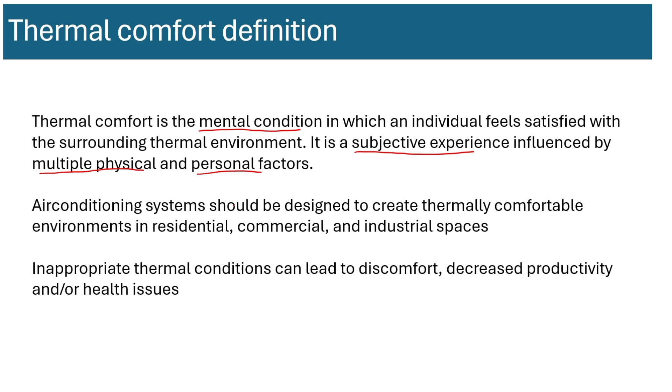For example, if you consider the environment to be a lab or a factory where it is essential to wear proper safety equipment, PPEs like a lab coat, a fire retardant coat, thick gloves, helmets, glass goggles, face masks, things like that - if those are needed for proper functioning in that lab, factory, or workspace, inadequate thermal conditions might lead to workers not using that safety equipment, which will create a safety issue.

So thermal comfort is one of the important considerations when we are designing an air conditioning system.

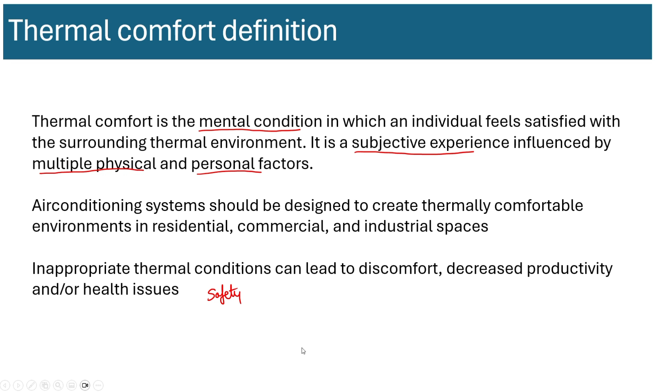Now let's look into the thermal experience of a human being. We all know that human beings maintain a core body temperature close to 37 degrees C. That's true under most cases for most people, somewhere around this.

We are always losing heat or gaining heat from the surroundings. We're always doing some work and losing heat that way. So how is our body generating the heat that lets us do all this? There is a metabolic reaction happening within our body, mostly within our digestive system, but also a lot of energy is released in your muscles and other organs. Overall, you could say there is a metabolic rate at which heat is being produced by the body - this is the generation term.

When you walk, move objects, climb, push things, or exercise, you're doing a lot of work, exchanging heat with your environment. You could be standing in the wind under a fan or a draft, so you're losing or gaining heat through convective means. If you walk under the sun or stand next to a fire, you might be gaining heat through radiative means. The same way you can lose heat through radiative means when you stand next to something that's really cold.

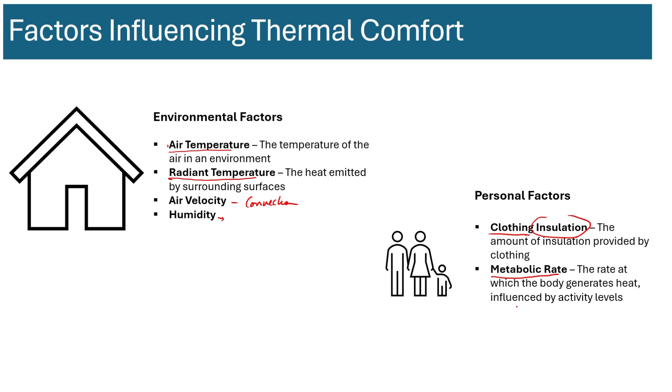In addition to that, the metabolic rate that we just discussed, the rate at which the body generates heat, is primarily influenced by the activity level.

There are several standards that provide guidelines on thermal comfort of a room or air-conditioned space. The most important one, or most commonly referenced one, is ASHRAE 55. That is primarily a North American or American standard, but it's referenced worldwide. Then there's the European standard on energy performance of buildings and ventilation for buildings, which closely correlates with ASHRAE 55 in methodology. The standards themselves may vary slightly.

There's also the ergonomics of the thermal environment ISO standard, energy performance of buildings indoor environment, and another European standard on energy performance of buildings addressing indoor air quality, thermal environment, lighting, and acoustics. Then there are two regional or national standards, one for India and one for China. In this lecture, we are primarily focusing on the methodology by ASHRAE and the European standard.

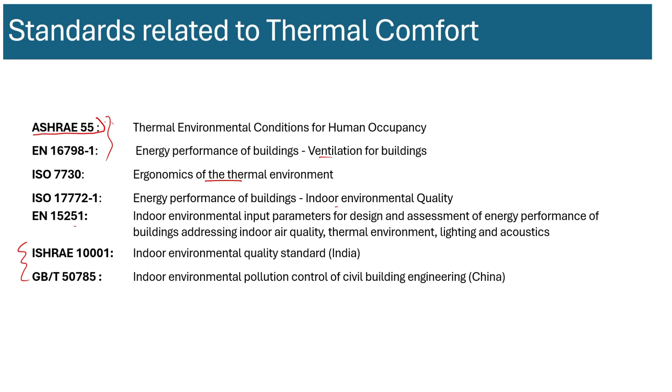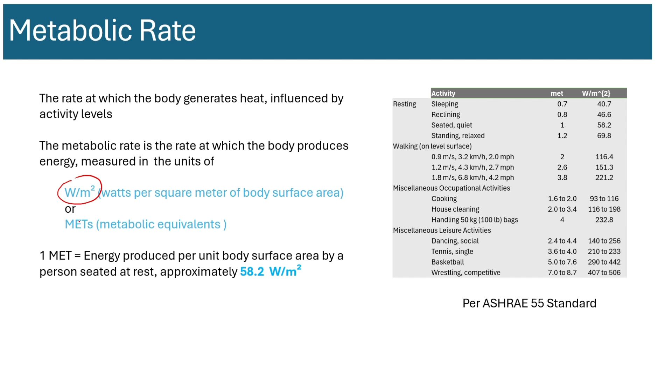Now let's look at metabolic rate. Let's figure out some ranges in which energy is released in our body. Typically there's a specific unit for metabolic rate.

The actual unit is watts per meter square, but we also write it in equivalence of METs, metabolic equivalence. 1 MET is equal to 58.2 watts per meter square. So it's basically power divided by area, or energy released or generated per second per area. That's what the unit is, and 1 MET is 58.2.

Where does this 58.2 come from? Apparently, this is the energy we generate when we are resting, when we are not doing much work, just sitting on a chair. This is the average energy that most people generate.

You can see some empirical results here. Seated quiet is 58.2, or 1 MET. If you're sleeping, it's lower than how much you would spend when sitting. You would have noticed that your sitting heart rate versus your sleeping heart rate is much different. So when you're walking, you can almost double the amount of energy generated by your body.

And when you're really doing strenuous exercise, for example competitive wrestling, you can be expending almost 8 times the energy that you would spend when you're sitting.

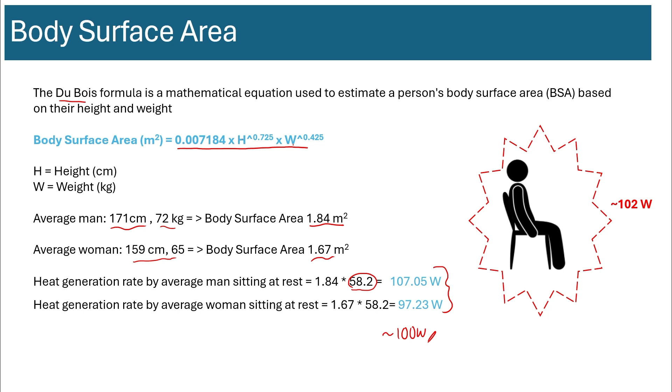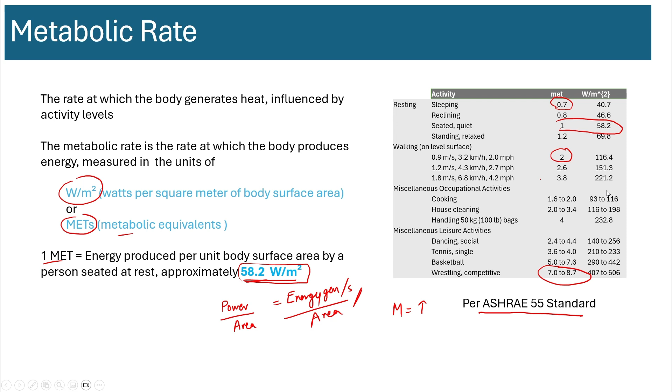All right, so the next factor is clothing insulation. How do the standards account for this? For metabolic rate, we could use some basic standards depending on the type of activity in that room - some of the ASHRAE standards estimate the amount of heat generated by the activity. The next question is what type of clothing the occupants would be wearing in that environment, because that has a substantial impact on thermal comfort.

So here also there is a specific unit called CLO units, used to represent the thermal resistance per unit area. Thermal resistance per unit area is, let's say you have a temperature difference T1 and T2, with a thermal resistance in between that has a thickness T and thermal conductivity K. The thermal resistance due to conduction is primarily defined as T over K, where K is the thermal conductivity, as the thermal resistance per unit area.

Now, CLO is defined in CLO units, but in SI units, the units would basically be the units of this item here. Thickness has units of meters, and the units of thermal conductivity K is watts per meter Kelvin. So overall it comes out to meter square Kelvin per watt.

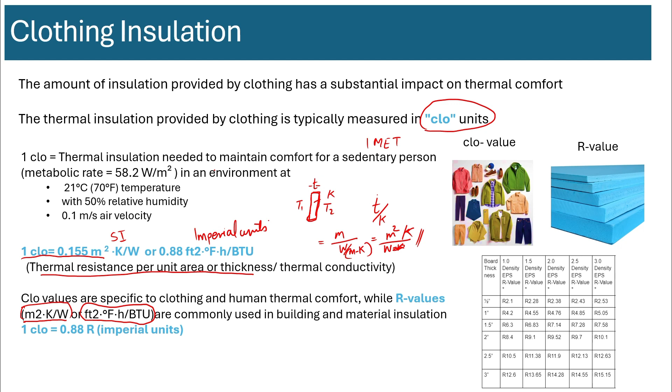Now what does 1 CLO represent? It is the thermal insulation needed to maintain comfort for a sedentary person, that is a person sitting quiet with 1 met, which is 58.2, in a particular environment: 21 degrees C, 70 degrees Fahrenheit, 50% relative humidity, and an air velocity of 0.1 meter per second, which is very low.

So in this condition, the clothing that is needed to keep that person neutral or feeling satisfied is defined as 1 CLO, and it's been empirically determined to have an insulation or thermal resistance value of 0.155 or 0.88 depending on the type of units you're using.

Now, how does this CLO compare to some of the resistances that you're normally used to? For example, if you have any experience with insulating your house or an equipment in your house, you would have noticed this construction material, which is basically EPS or XPS, extruded polystyrene.

That is typically represented by an R value for its resistance. The smaller the thickness, the smaller the R value, and R value is basically the same as thickness divided by thermal conductivity. So the thinner the material, the smaller the R value, right? So it's the same.

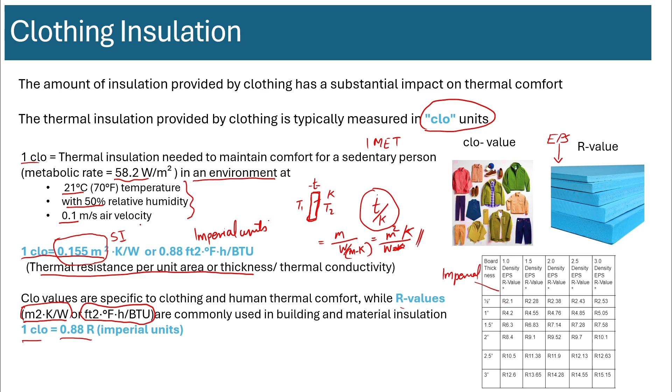How are the clothing insulations measured to figure out whether the person is thermally comfortable in a particular environment? The way they do that is using two thermal conductivity tests. One is thermal manikin testing—you create a thermal mannequin which is life-sized, and you have heaters inside the mannequin, and you also use heat flow sensors.

The mannequin is typically heated somewhere between 35 to 37 degrees C, which is close to the core temperature, and it has a control system that tries to control the temperature to this range. Now you change the ambient conditions to make sure the mannequin cools down below this, and then you'll have to adjust the amount of heating needed to match the new temperature.

So the difference in the amount of heat that is needed with and without clothing material under a particular environmental condition is used to determine the CLO value of that particular cloth.

You could also do this without the mannequin, with just a flat heated plate covered by the fabric, but that doesn't fully account for the total surface area of the person. Both these methods are used, and this is how empirically the CLO values for each type of clothing are found out—this is sort of a heat transfer test aimed at making sure the core temperature is maintained.

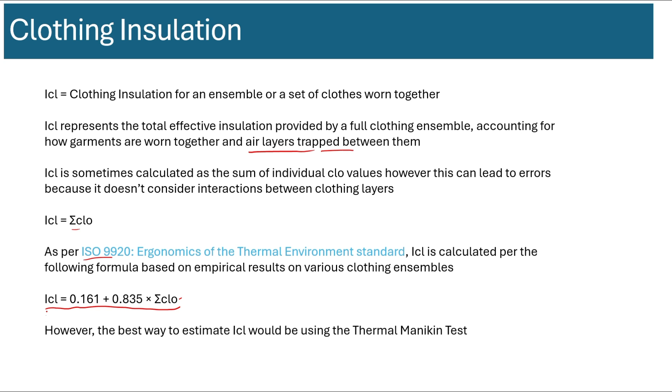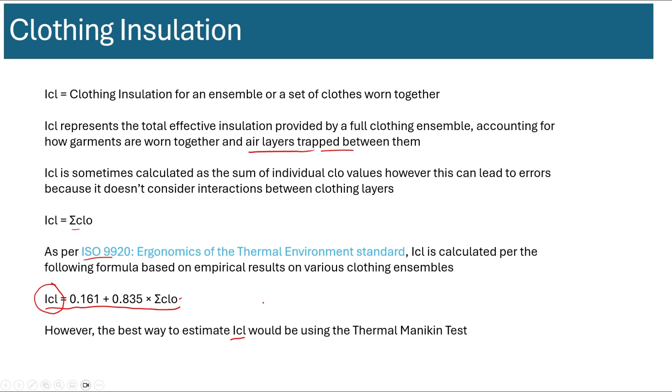So sometimes approximate formulas are used. ISO 9920 proposes a particular formula: if you have different clothes with different CLO values, instead of summing them together, you use this formula to estimate an average ensemble insulation of the whole set of clothes you're wearing. Typically this is the value we need overall to understand the thermal comfort within a room.

So we looked at the two personal factors that affect thermal comfort: the metabolic rate of the occupant and the clothing of the occupant. Now we look at the environmental factors, and the first one is air temperature.

What do you mean by air temperature in this sense? Let's consider the weather forecast. I don't know whether you've ever tuned into weather channels, especially in the US. There are several weather channels, local and national level, and they always report the daily average temperature, the max, min, all those temperatures every day. Sometimes they predict for weeks and months ahead. So what temperature are they talking about?

When you talk about weather temperature, they're talking about the temperature outside your house. But when you walk outside, the temperature is not the same if you're under a tree in the shade, or if you're exposed to sunlight, or if there is rain. The feeling of temperature is different. So what temperature are they measuring and how are they measuring it?

What they're measuring is basically dry bulb temperature. This will be clear when we talk more about dry bulb and wet bulb in the psychrometrics part of this course. This is the temperature of the air in the environment. When you're measuring the temperature of air, especially outside - in our context we are talking about temperature inside a room - but let's just stay focused on measuring the outside temperature.

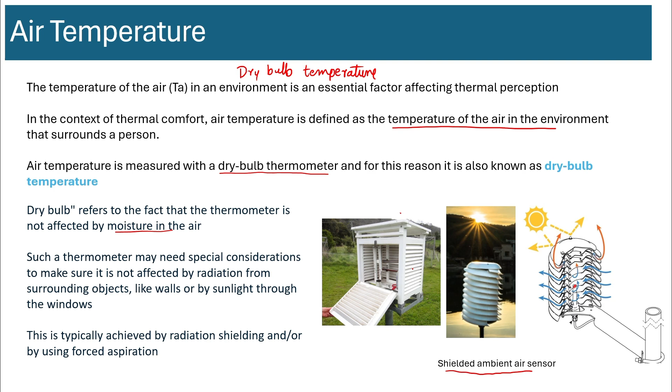Now let's look at radiant temperature. It's usually referred to as mean radiant temperature, and it's a critical parameter in estimating thermal comfort of rooms. The definition is it represents a uniform temperature of an imaginary environment where the radiant heat exchange between an occupant and the surroundings is the same as in the actual environment in which he or she is present. In other words, it's accounting for all the radiation sources or sinks in that room. So how do you measure it?

In this case, you don't want the radiation to reflect, you want the radiation to be absorbed. So you have a black body, a globe almost, that picks up radiation from all angles, and the temperature sensor is at the very center. Typically the diameter of this globe is 15 centimeters, and they're usually called globe thermometers. They're very commonly used in outside conditions, primarily for measuring the external radiant temperatures.

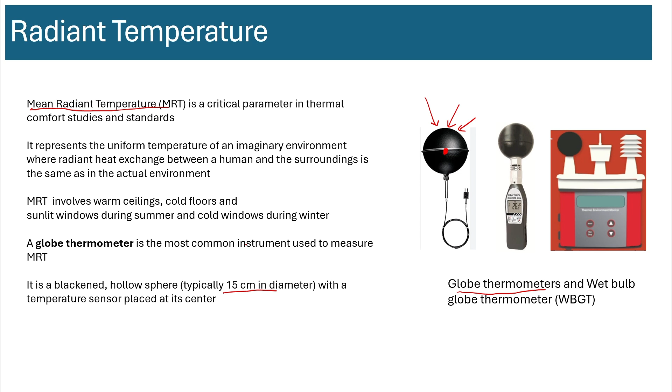Now the third parameter, or external environment factor that determines thermal comfort, is air velocity. It's a critical factor that helps regulate the body temperature both by directly cooling the surface of the body through convection and also through evaporative cooling when your sweat evaporates. So it's important in these two conditions. In a warm environment, when you feel warm, if you turn on a fan, even though the temperature of the air is not affected much, you feel a little bit colder because of extra heat transfer through both convection and evaporation.

If it is between minus 0.5 and plus 0.5, that means it is satisfactory for almost 90% of the people. So what you need to take away is that the lower limit for absolute low air velocity is 0.1 meter per second for human comfort. You want some airflow in the room, and the minimum recommended is 0.1 meter per second.

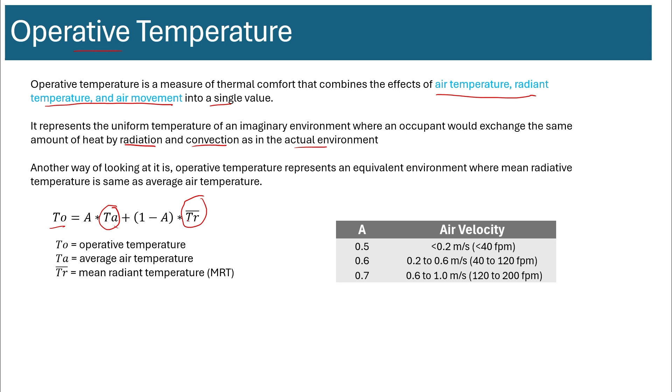When these two are the same, this value is also the same: if TA is the same as TR, then TO is the same as TA. So operative temperature represents an equivalent environment where mean radiative temperature is the same as the average air temperature. The constant value A here is dependent on the air velocity, and these are the recommended ranges.

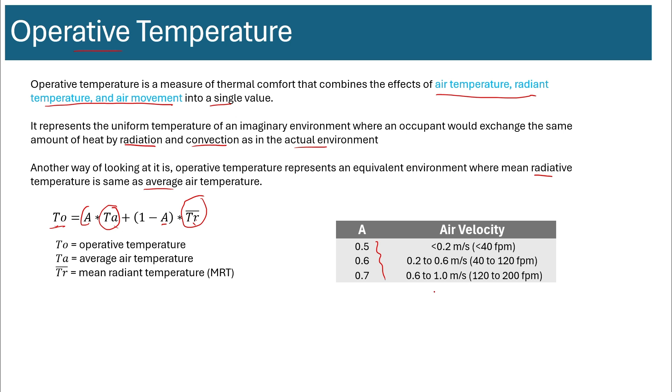Before we go into how to read operative temperature versus different values in ASHRAE 55 and figure out the recommended thermal comfort region within a room, we have to figure out how the ASHRAE 55 standard was developed.

It was an empirically developed standard, meaning it was done based on a lot of experiments. The experimental values were obtained by getting votes from test subjects - actual people placed in carefully controlled climatic chambers where variables like air temperature, radiant temperature, humidity, and air velocity are precisely controlled.

The test subjects were asked to report the type of clothing they are wearing, and they are typically asked to sit on a chair so that their metabolic rate is close to 1. But sometimes they are also asked to vary their activity level, a little bit of light walking within the room.

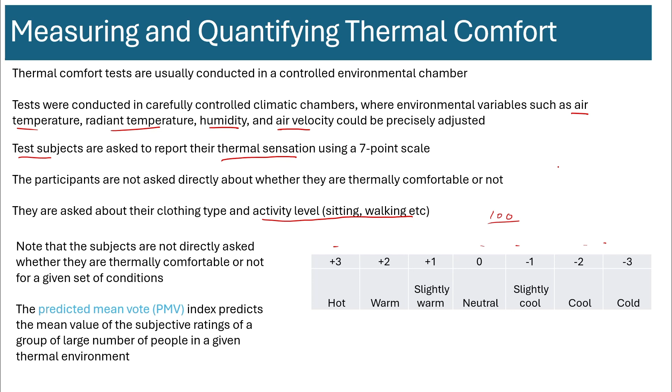They were never asked, are you comfortable or not? The way they figured out whether most people find that room comfortable was by using an indirect method. Let's say they asked 100 people for the sake of argument. If all 100 people provided a score for a test condition that was extremely cold, and all of them put -3, then the predicted mean vote for that will be -3.

If everybody found it to be neutral, then the average will be 0. And if everybody found it to be hot, the average will be 3. So the predicted mean value is going to take a value between -3 and 3. And if it's 0, that means it's perfect - everybody finds it acceptable, almost neutral. But you can see sometimes the plus and minus ones could also cancel out.

However, this is not directly used. This is further refined by using another variable called the predicted percentage dissatisfied. So if you get an average value of PMV, predicted mean vote, the predicted percentage dissatisfied represents how many percentage of people will find that room not satisfactory. Lower the number of people that finds it dissatisfactory, the better the room condition.

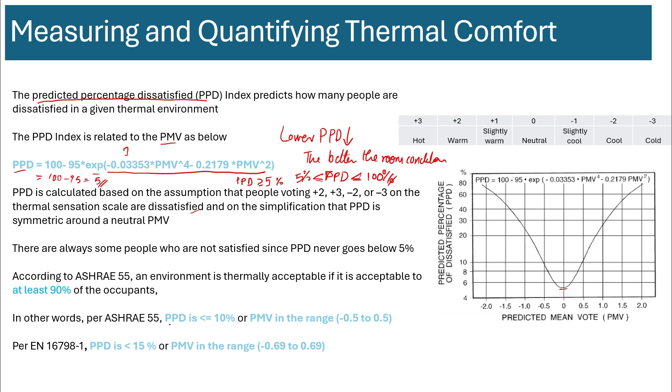So it can take any value from 5% to 100%. Now, what does ASHRAE recommend? ASHRAE recommends that PPD should be less than 10%, meaning less than 10% of the people should find it not satisfactory. If more people find it not satisfactory, then it's a problem.

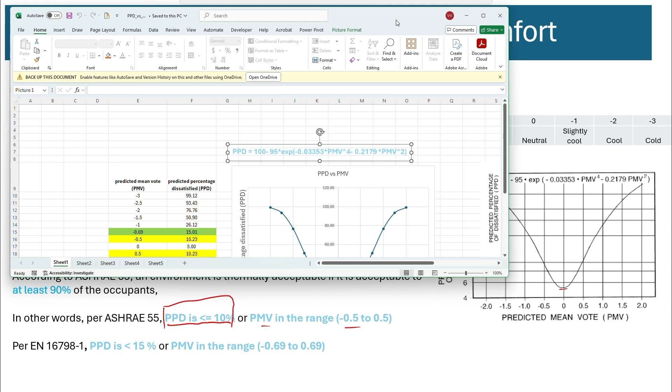Now, what is the PMV range for which that will happen? You can easily do that calculation using this formula in Excel. Let me try to get the Excel file. So I've put in the formula here - so from minus 3 to 3 PMV, you can see that it almost goes from 100% to a minimum of 5%.

And if it is minus 0.5 to 0.5, then you're close to 10%. So this is the range in which ASHRAE says a condition is comfortable for people.

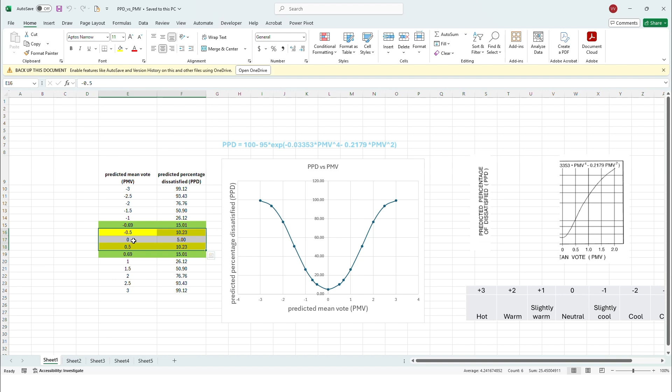The other standard, the European standard, is a little bit more lenient. They say if less than 15% of people are dissatisfied, then the room is thermally comfortable. So that means you get a little bit wider range of the predicted mean value - more people can find it a little bit more cold or a little bit more warm.

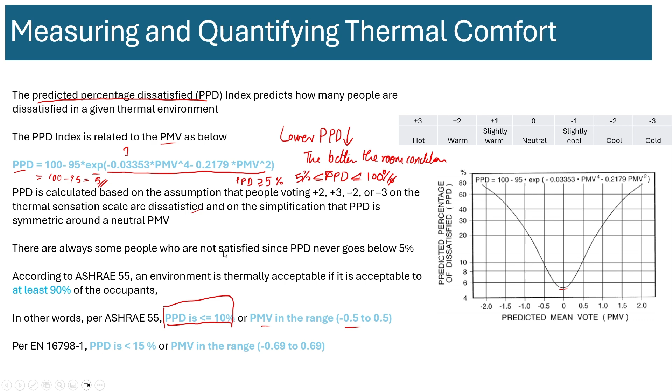So this is how the predicted mean value is calculated. And for a given operative temperature versus another variable, the predicted mean value ranges are plotted and figured out for estimating the best operating conditions for that room.

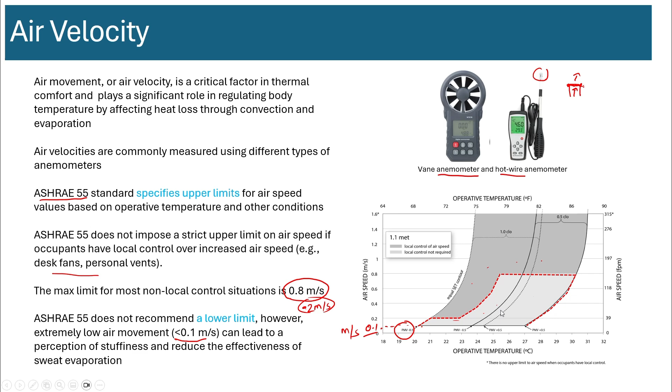The comfort zone defined by ASHRAE 55 is a chart that looks somewhat like this. This is basically a region in which a person would feel comfortable, within a range of operating conditions. It's primarily defined by the operative temperature, which includes both the dry bulb and the radiant temperature for still air, and the other parameter, the airflow speed.

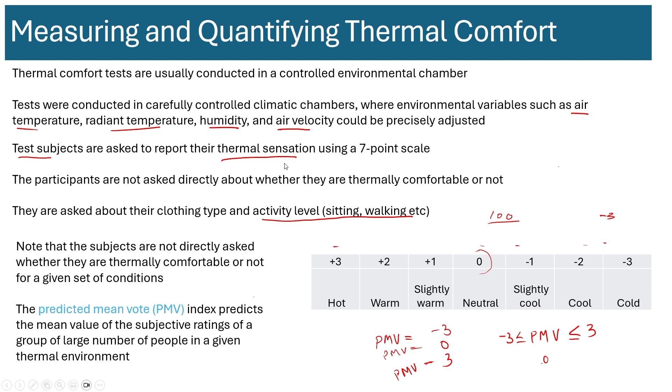According to ASHRAE's methodology, where they asked people whether the room is hot, cold, or neutral—basically a sensation of the thermal aspect—there was no limit that could be obtained for humidity. The reason, in my opinion, is they didn't ask whether the room was comfortable. I know for a fact that if the room is 100% humid, regardless of the airflow, at most temperatures it would feel really uncomfortable. And if the room is really low in humidity, close to 0%, even then it would be really uncomfortable.

To understand this further, let's look at an online thermal comfort tool provided by the University of Berkeley in California. If you use this link, you can go into this website where you can create those ASHRAE thermal comfort zones by changing any of the parameters: the operative temperature, airspeed, humidity, metabolic rate, clothing level, etc.

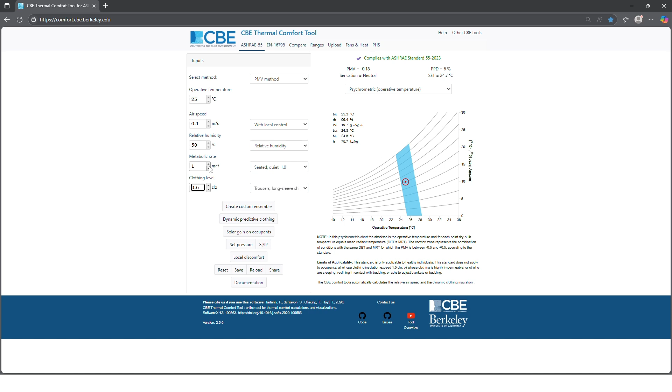You can keep changing other things—for example, if the room is meant for another activity, like lifting weights or light machine work, you need to be a little colder, and your clothing level can't be much warmer, or it will create a PPD issue. So you can roughly estimate the temperatures to a certain extent, but it's hard to find an upper and lower limit for humidity. In most cases, you could go to a really high humidity value and still be okay—this humidity value is creating a limit for temperature, but there's no actual cutoff for humidity itself.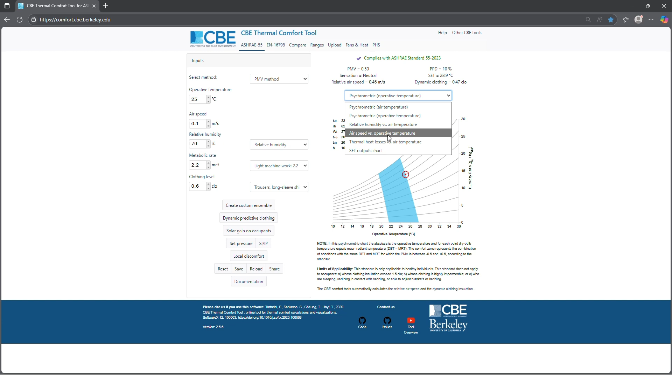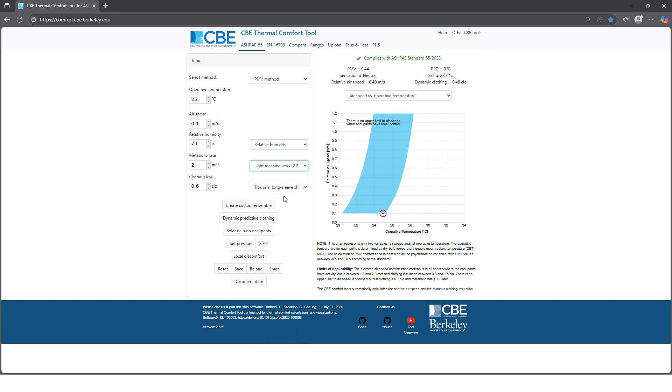In the ASHRAE terminology, 100% humidity is allowed, and 0% humidity is allowed, which is not comfortable for human beings at all. There is also the option of comparing the operative temperature to the airspeeds, which we looked at earlier. So the way you would do that is plot airspeed versus operative temperature—you could do typical seated quiet, low humidity, and no local control.

So in that case, you can see the airspeeds are limited between 0.1 meter per second and 0.8 meters per second typically. That's the typical airflow that you are allowed in that room. There is no local control.

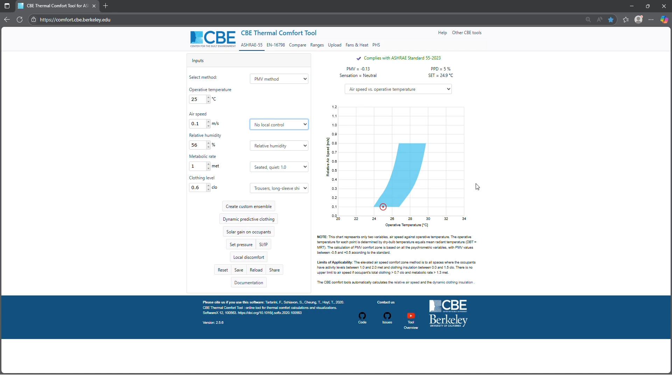So when you get a chance, try playing with different clothing levels, metabolic activity rates, humidity controls, and keep changing the operative temperatures to see whether you're inside or outside the thermal comfort zone.

Now let's look at the rough recommended humidity ranges according to different standards. ASHRAE 55 doesn't really recommend a humidity limit, even though in the past, several years ago, it did recommend 30% to 60%, but the latest standards have no humidity limits.

The European standard roughly recommends 20 to 70%, and that's recommended by several international standards. The Indian standard also recommends 20 to 70%. The Chinese standard recommends an actual moisture content of the air to be less than 12 grams per kilogram of dry air.

The problem with ASHRAE's no humidity limits, and the problem with most standards not being able to recommend a humidity zone that changes with respect to operative temperature, is because of the way the questionnaire was given to people. They were asked for a thermal sensation of comfort, not general comfort. The thermal sensation of comfort affected by humidity is different from the general feeling of comfort affected by humidity.

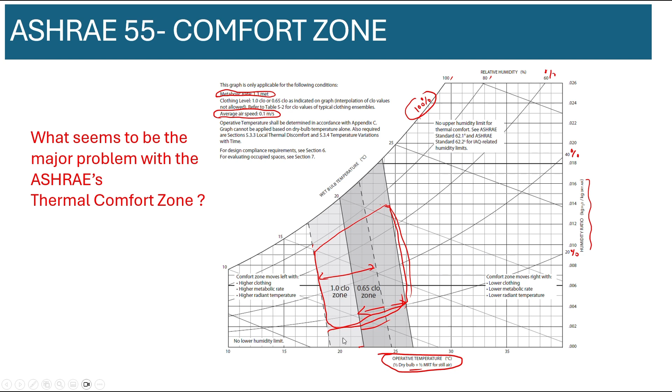They were asked, 'Are you feeling cold or warm?' So there is a fundamental change that needs to happen in the way these tests are conducted, to generate more meaningful thermal comfort zones with more limits at the top and bottom, rather than going to full 100% and 0% humidity.

Having said that, it is also very dependent on the culture and locality of people. These tests were developed mostly on people in North America and Europe. A test conducted at PSU by Achan Juntakan, who is also teaching this course, had preliminary estimates of humidity ranges on the higher side, in which Thai people were found comfortable, around 50 to 70%.

North Americans and Europeans, for example, find much lower humidities to be comfortable too. So this has to be done on a regional basis, country by country, climate zones versus climate zones—all those effects need to be taken into account, along with the age of people and demographics. It could be very subjective, and what's recommended in ASHRAE 55 may not be ideal, for example, in the Thai situation.

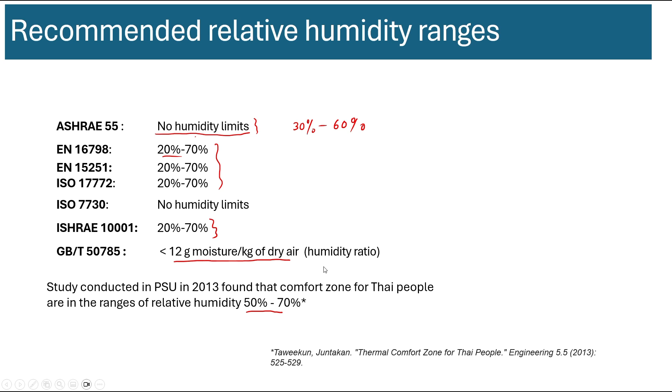So in general, if you have to go by a number for max relative humidity in the room, my recommendation is to not go above 70% for any temperature setting. A higher humidity setting could also lead to growth of mold, dust mites, and generally the growth of microbes is favored when you have high humidity in the room, so keeping it below 70% for most typical room temperature conditions would be ideal.

And if you're dehumidifying the room, try not to go below 30%, to reduce the effect of dehydration on your body, reduce the chances of mucous membranes getting irritated, and reduce the chance of getting a cough or other respiratory infections. So keeping it not less than 30% is also recommended.

All right, so I hope in this lecture you got a general idea about the factors that affect thermal comfort, both the personal and the environmental factors. All right, thank you.